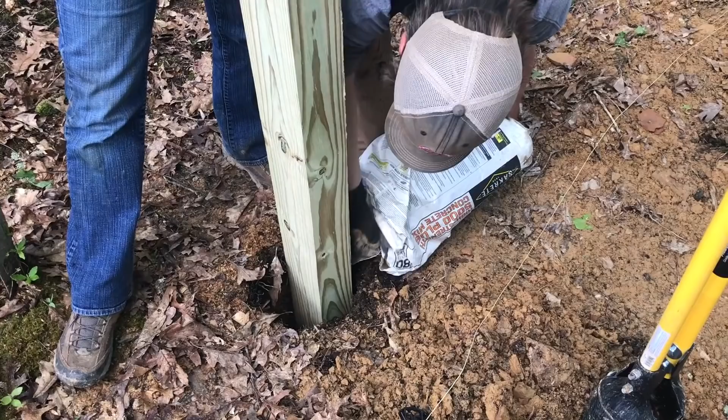And so you see behind us here the work we did today. I took a day off from the office, we got in the truck early this morning, drove up here with our supplies. The game plan was to get our posts set in the ground with concrete reinforcement, so they'd be nice and cured and solid before the holiday weekend comes up, and we can come up here and do the rest of our build. So again, you may be wondering, what are we building here?

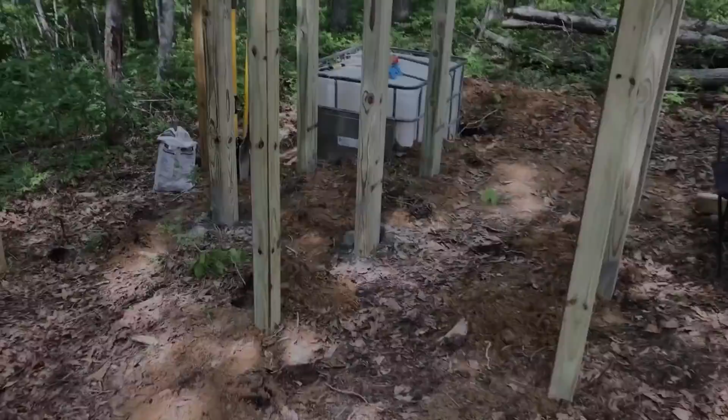Is this some sort of tiki pit where we'll put heads on poles? No, this is actually the foundation of what we're calling our Johnny house, or our vermicomposting toilet. So we'll detail it here. In our last video I showed using the SketchUp software and how we use it to design things, and that's what I'm going off of here, is this design.

So you see a lot of poles really close together, but the whole point of that is I wanted something very sturdy. I'll get it on the other side. Something very sturdy, and it needed to have elevation. So let's go over here behind our tank. I think this will give us the best idea of elevation.

Okay, so here's our IBC tote. This is a run-of-the-mill IBC tote, and we have recessed it in the ground. We haven't buried it. And if you look at the details on vermicomposting, you don't bury it, you set it on the ground. We're going to recess it a little bit because we needed some elevation drop.

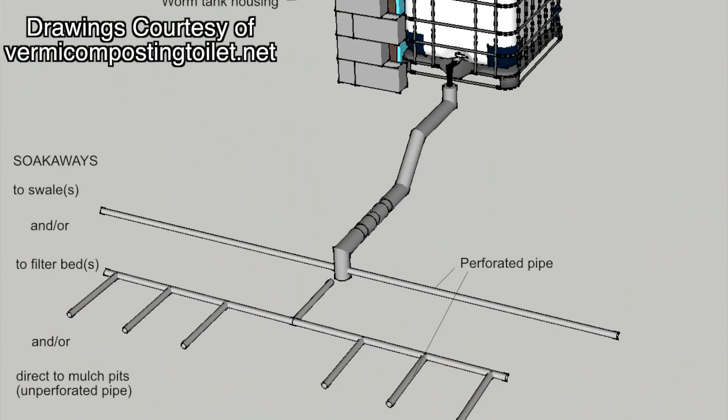So the concept with vermicomposting, and I'm going to link to a website below in the video description, where you can see there's been a lot of study, a lot of research, a lot of testing done on vermicomposting toilets. So the concept is you have a tank, and they recommend IBC totes just because they're so easy to come by.

This tank has an outlet, kind of like a septic tank, where it would go out into a very small drain field, unlike a septic tank, which obviously would use a huge drain field. But the outlet is at the bottom, whereas in a septic tank the outlet would be at the top, and you'd have just your top water coming off with your solids settling.

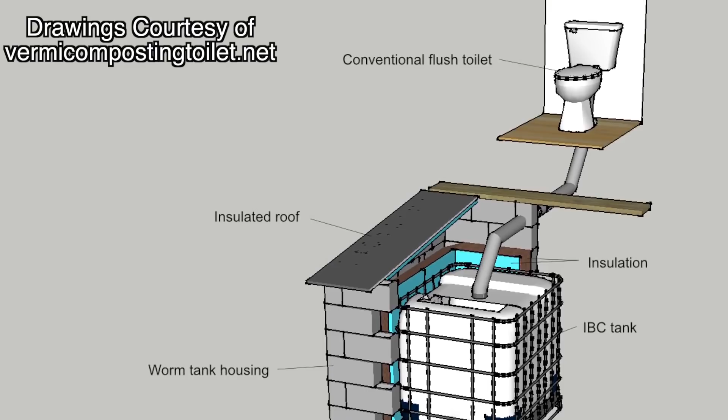This works differently. Instead of the tank being full of liquid and your waste, you actually open up this panel here. You cut a hole in the top of this IBC tote to make a panel. You fill this 3/4 full of wood chips, maybe with a little gravel base underneath, just so things can filter through. And you'd have your sewage coming in through the top.

So the thing we like about this is it's going to allow us to have a real flushing toilet in our Johnny house. And that helps when we have friends that come up and people that aren't accustomed to going to an old school outhouse or composting bucket. Pooping in a bucket, some people just don't think that's very romantic. So we're going to be able to use a real flushing toilet.

We're going to do rain catchment off the roof that will feed our toilet tank, so it'll fill that up and allow somebody to flush. So obviously all their waste, toilet paper and all, comes into this tank, and it lands on top of that layer of carbon, all that wood chip carbon in there. And so what happens is, of course, the solids stay on top. The liquid and the urea kind of filter down through.

And of course, the nitrogen in all your urine is really reacting well with all those wood chips. And it filters through, and if you've got it built right, there's a small amount of gray water that comes out into another carbon bed. So we'd actually dig out a little area here, fill that full of wood chips, have a perforated pipe that comes out into this drain field with all that carbon, and of course, again, it takes the last little bit of nitrogen out.

And what they recommend to make sure you're not dumping any hot water, black water into the soil, is to plant nitrogen-loving plants around them. If they don't do too well, then you don't have too much nitrogen coming in. If they're flourishing and you get crazy big plants, then hey, I'm a little too black with my gray water there.

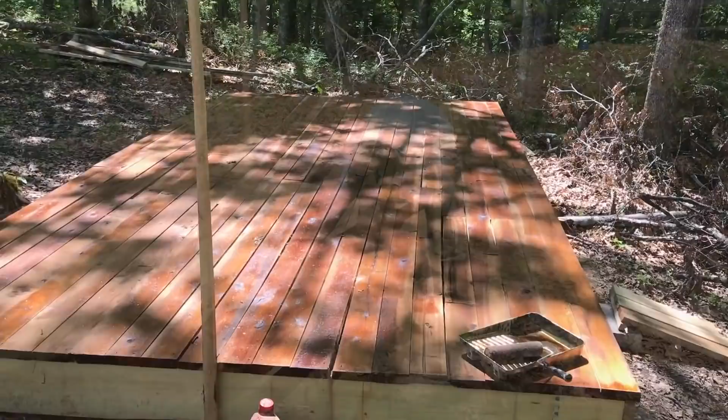Kelly and Cam, actually Cam did most of it. Cam put a nice oil finish on our deck over here. This is poplar that we milled for our deck, that we put our tent on, and eventually will be our porch to our cabin, back porch probably. So a nice coating of oil there to cure it and keep it from rotting out so much and make it look sexy. That looks fancy. That's like something you'd pay a professional to do.

Okay, so these posts seem a little excessive. I bought 8-footers and I wasn't quite sure what my elevation was going to be. I wanted to be able to measure this, get my drain pipe. Obviously I want enough relief coming out of the base of the toilet that it runs into the tank. So I just went ahead and set all 8-footers in concrete. We have varying heights here.

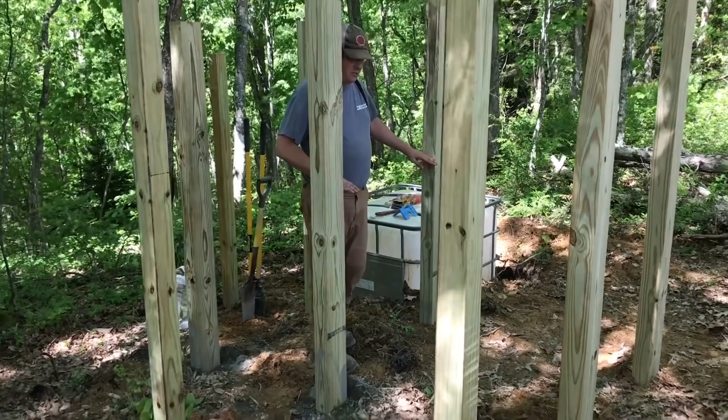Now I can get my elevation established, so the floor of our toilet room will probably be about as high as my waist here at this pole. Obviously further back it'll be a little higher. So you can imagine I'm going to cut these 6 4x6s all flush, and then there'll be a sheet of 4x8 plywood that sits there, so that'll be the floor. I'll share the drawing again I shared in our previous video. This small rectangle will be a 4x8 sheet of plywood.

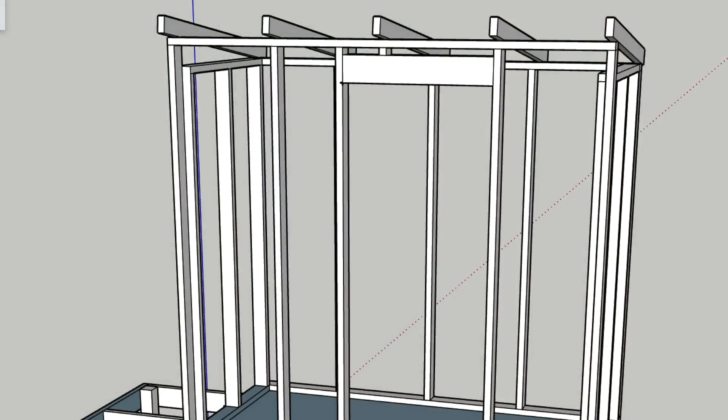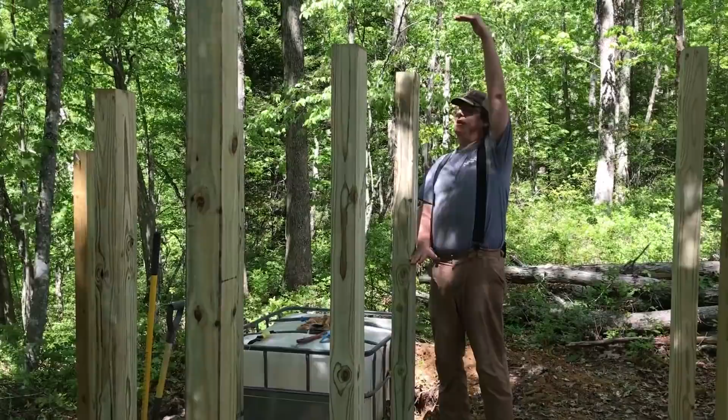It'll be framed out, door here, with a roof sloping back, single angle roof, with a gutter that's going to catch rainwater. And what we'll most likely do is have a 55-gallon drum turned on its side here so the rainwater comes off. If the floor is this high, you can imagine we're going to have a 7-foot ceiling in there, so it's going to be much higher than this. So we can have that tank suspended here on its side like I have on our chicken coop at home.

Rainwater coming into the gutter, piped into the 55-gallon drum, gravity fed down to the toilet. If the toilet sits right here, imagine if I was backing up to the toilet, it'd be right here, but obviously much higher. Then put the tank elevation about right here, so we'll be able to gravity feed into the tank, so it'll fill up the water in the tank. Of course, flushing, drain, bang, right into our IBC tote.

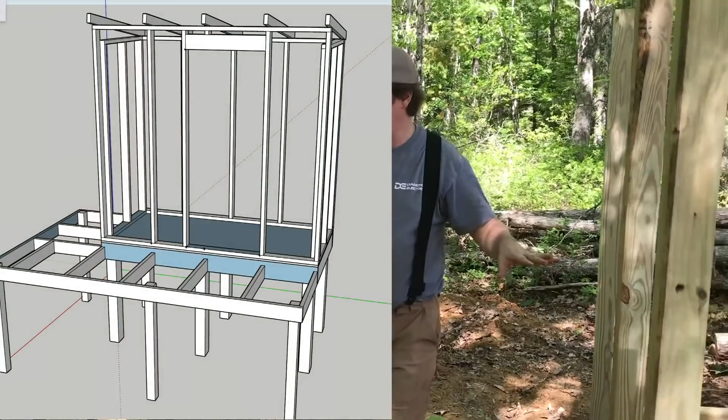So we'll cut these off to be flush with our flooring, and stud these up. Now these smaller 4x4s here in the front, you can imagine is an L shape that goes around our 4x8 Johnny house. So you'll come up the stairs here, to again about that elevation. There'll be some deck boards that come down to make an L shape. Turn here, and this will be a little privacy area. We'll have a shower head, so we'll have an outdoor shower here.

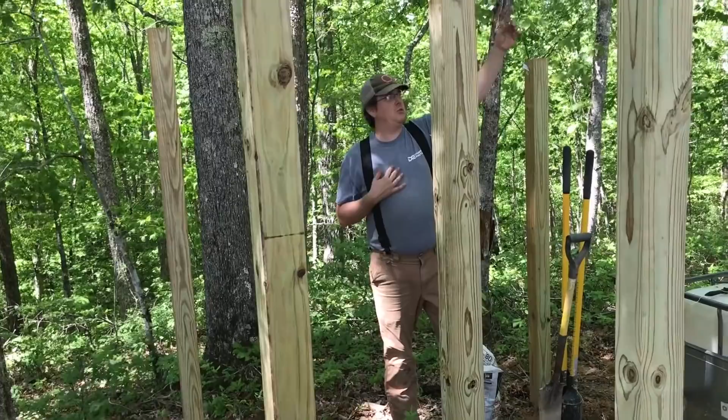And again, in that situation, we won't feed from the 55-gallon drum because that'll be ambient temperature. Nobody's man enough to do that, are we? Kelly is. You man enough? No.

So we'll have a different system to incorporate warm water. But I have a shower head up here, just some deck boards, and we'll catch the water and probably just gray water that over into our same drain field there. So it'd be a nice little privacy area here. This is the back corner. You can see over my shoulder, the mountain really just kind of drops over the hill, so we don't have too much to worry about there as far as visibility goes.

The county road's behind Liam, our cameraman. So this will be nice, secure, tucked away. We're under the shade of this nice hemlock and a couple oaks, so kind of a neat area. Obviously under the trees we'll have to keep the gutters clean, but I think this is a nice private area. So really excited to get working on this. Our plan is, the day that you're seeing this video, if I get my schedule right, we may already be up here starting to build this structure. So we'll document that and share it as we go along.

Okay, so we're back from camp now and actually ready to go back up and start building. So we're going to detail that in some future videos.